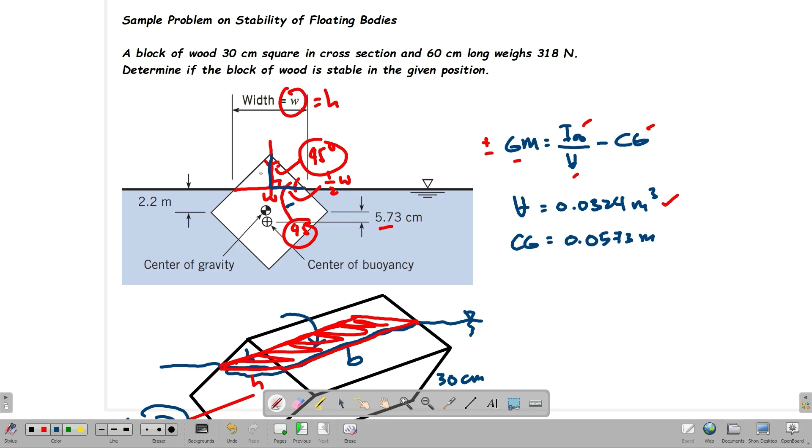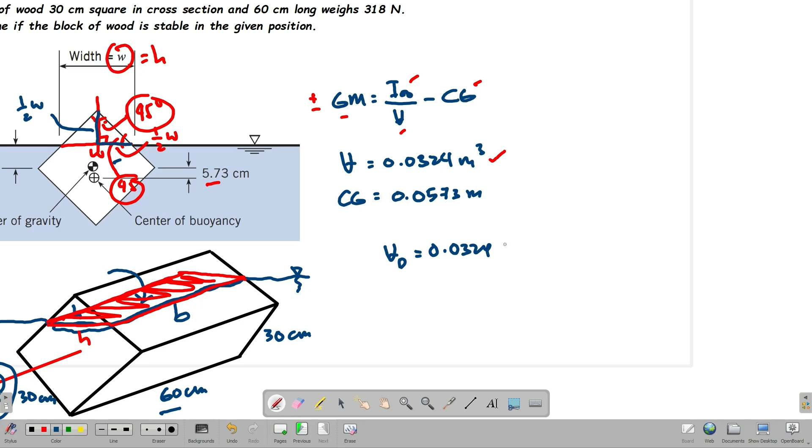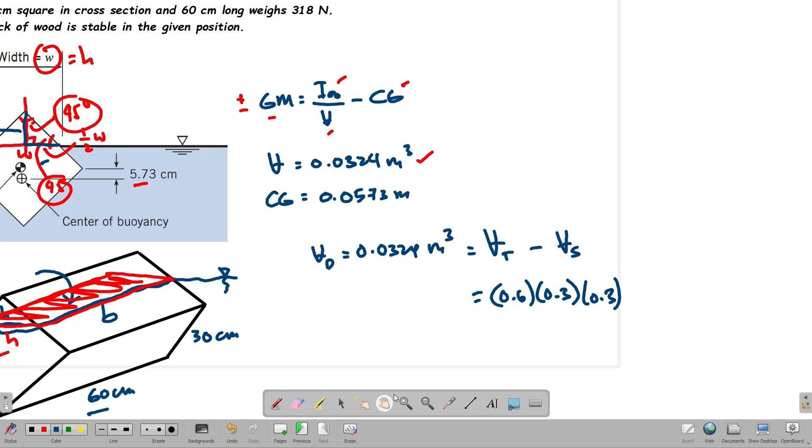So the volume displaced, V, which is 0.0324 cubic meters, is actually equal to the total volume minus the volume at the surface, the part not displaced. So the total volume of the block of wood is 0.6 times 0.3 times 0.3, since those are its dimensions. The total minus the volume at the surface gives us this volume.

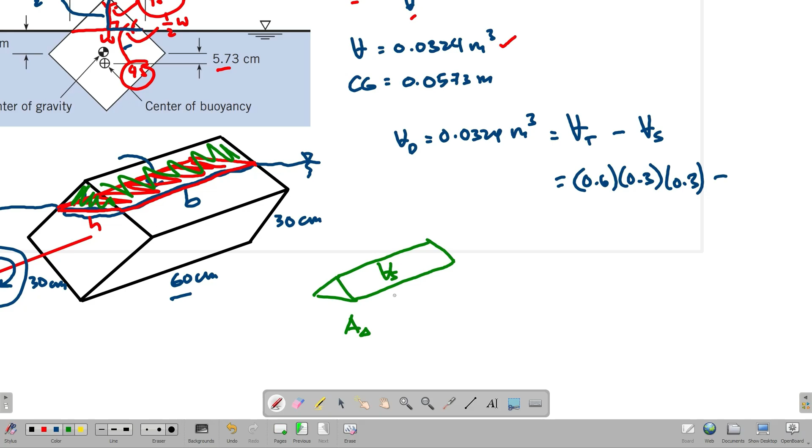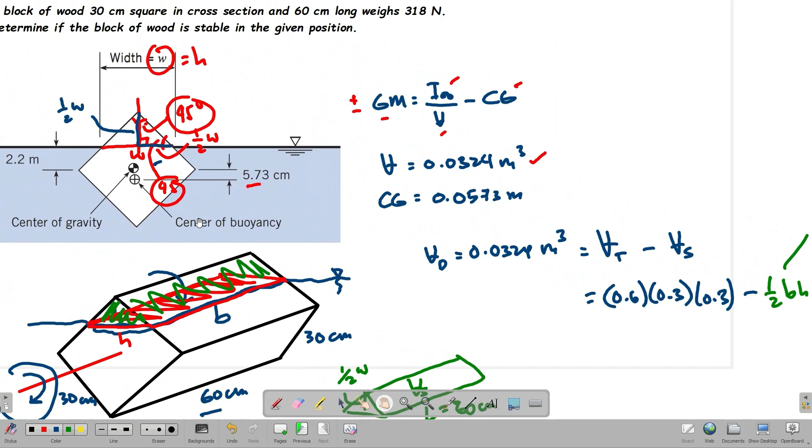So this is VS, which is just the area of the triangle times the length, which is 60 cm or 0.6 meters. So we have 1/2 base times height times 0.6. And we know that base is just W, and the height is 1/2 W, according to our earlier discussion. So we have W times 1/2 W.

Therefore, our equation becomes 0.0324 cubic meters equals 0.6 times 0.3 squared, since there are two of those, in cubic meters, minus 1/4 times W squared times 0.6 meter.

So W is the only unknown remaining. We have W equals... let's just compute this directly on the calculator. Subtract this, then multiply by 4, divide by 0.6, then take the square root, okay?

So we have 0.6 times 0.3 squared minus 0.0324, then times 4 divided by 0.6, then square root of the answer, giving us 0.379. So that's 0.379 meter. That's now the value of W.

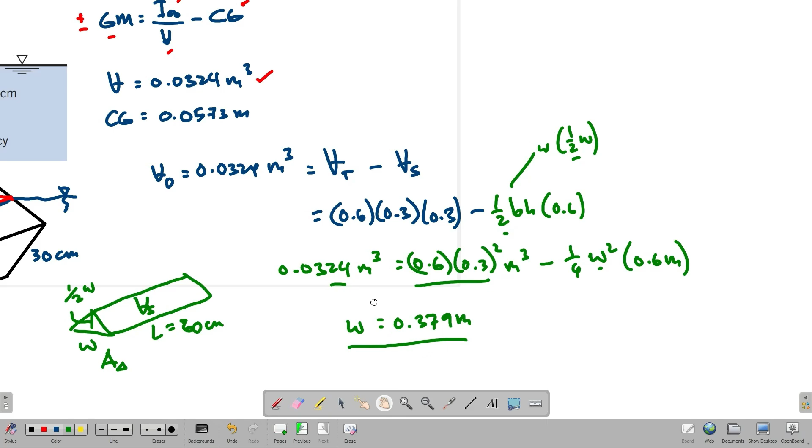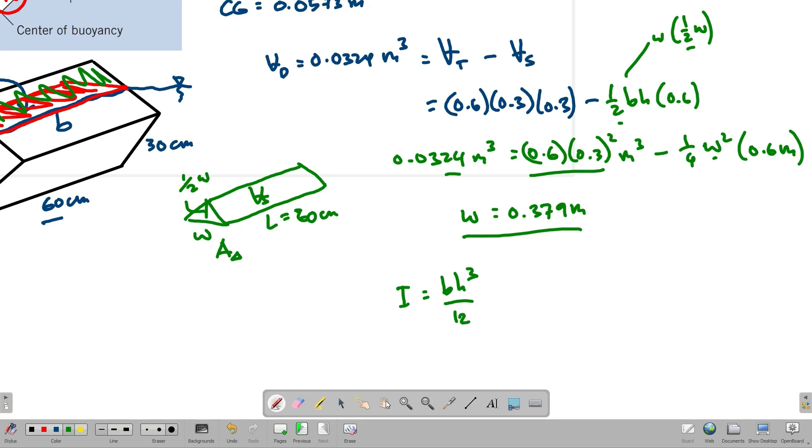Now where do we use W again? To get I. So to get I, we have I equals BH cubed over 12. Again, this red area is the one that rotates, since that's parallel to the waterline. So our base there is 0.6 meter times our height, which is now W.

0.379 meter cubed divided by 12. So therefore, our I is this answer cubed. Let's scroll down a bit. We multiply by 0.6 divided by 12. So that's 0.0027.

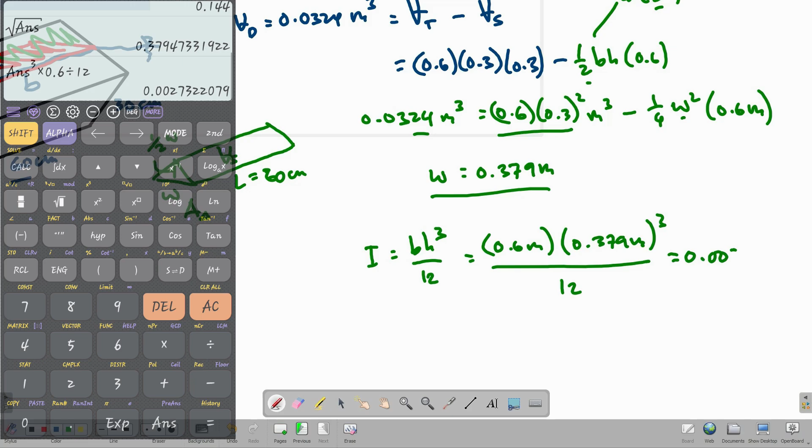So we have I, which is 0.0027 M to the 4th, divided by V, which is 0.0324 M cubed, minus CG, which is 0.0573 meter. The 4 and the M cancel out, so only one M remains.

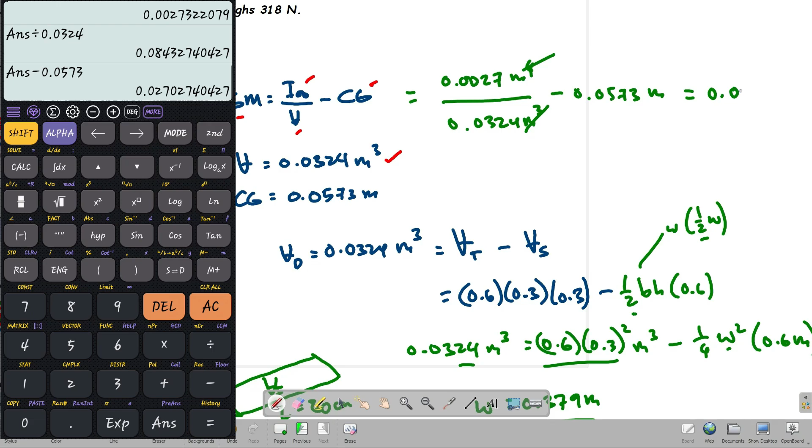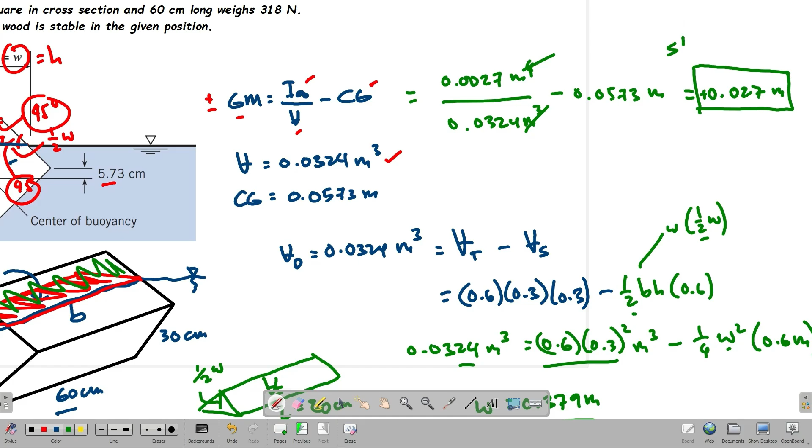So on the calculator, we just divide 0.0324 minus 0.0573. It's now positive, giving us 0.027 meter - wait, that's 0.027 meter, which is now positive. That means it's stable at that particular position.

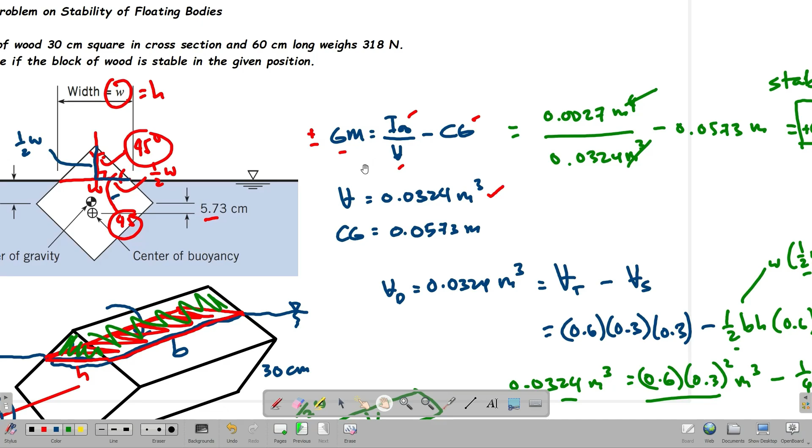So that's it. Again, we just need to analyze the length of GM, whether it's positive or negative. So that's it for this sample problem, and I hope it's fairly clear. This part is really tricky.